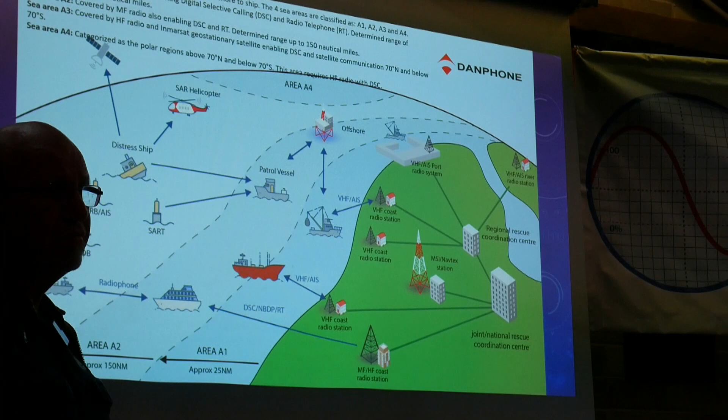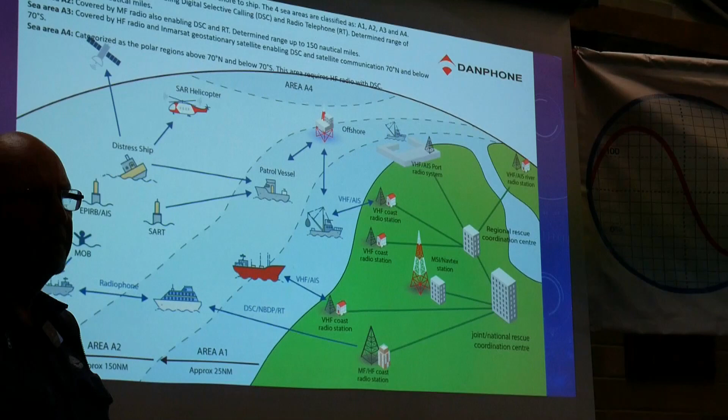You've also still got your MF/HF radio, but now with the MF/HF radio, as well as voice, you have digital selective calling, where the DSC terminal is programmed with the ship's identity, which is a 9-digit maritime mobile service identity number. So that identifies the ship, and you can send a DSC call from one vessel to another for general establishment of communication, if you want to request that they tune to a specific voice channel. You have to have the digital call.

Like there's no one listening until it's opened up by selective call, isn't it? No, well, it's inbuilt with the HF radio these days. It'll have a DSC watch receiver inbuilt. Yeah. So what I'm getting at, you can't get on the radio and call anybody with a voice because no one's listening. No, I mean these days no one's maintaining watch. So basically you've got to establish a circuit, to call the vessel via selective call. Yeah. And that's the same with VHF as well these days.

Depending on the configuration of the vessel, you can have either a dedicated one channel, on 2187.5 kilohertz, or, if you go to another option, they have a 6-channel scanning receiver running in the background, which covers 2 megs, 4, 6, 8, 12 and 16. I won't bore you with the exact frequencies. I put a call out on 7045 from a ship once or twice. Oh, really? Okay. No one got back. Yeah, for various testing. But if somebody's listening on that frequency, they can still hear it, can they?

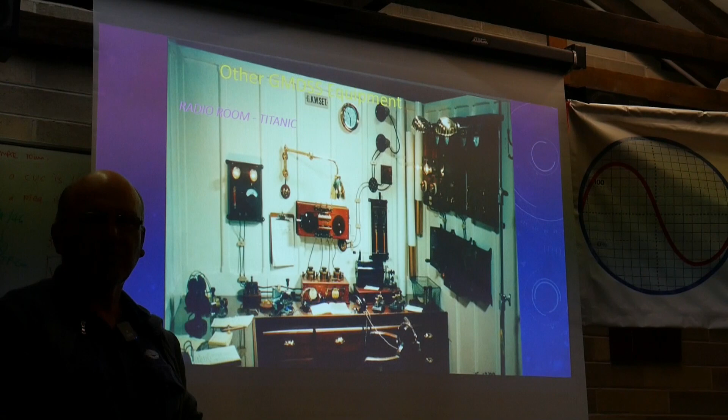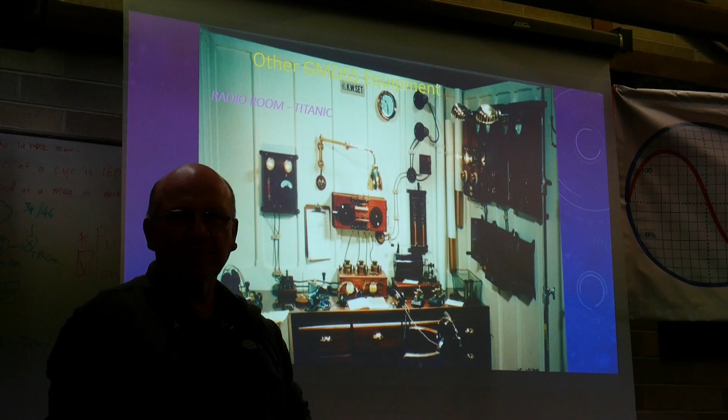In those days, any time I'd go on board to do a radio survey to check the equipment, the last thing I wanted to do was actually try to tune up a transmitter. So it was Sparky's job. Tune up on a particular frequency, and I'd just check that it's got the right meter amps. We used to get sometimes 30 amps aerial current on 500 kilohertz. Wow. Last thing you wanted was to get an RF burn as well.

In those days that's the way we used to calculate. There wasn't really a power reading. It was the meter amps, the aerial current, and that's it. That was Australia, but in Japan they'd send a vessel with a field strength meter and do a plot. A much more thorough way. I think the higher your aerial was, the better meter amps you used to get out of it. And that was the thing, trying to achieve the right readings.

Anyway, getting back to where we got to. We've talked about the VHF. The HF, again, same sort of principle as I was saying. You can have voice, and you can have digital selective call.

Again, if all else fails, you've got the distress button on the front of the radio, which you hit and it'll send out a distress call, and any vessel within the area should hopefully pick it up. With the advantage of the Inmarsat one, obviously it relays straight up to the satellite. So regardless of where you are, you don't have to rely on ship to ship, or someone nearby. It's just basically straight up to the satellite, down to the closest.

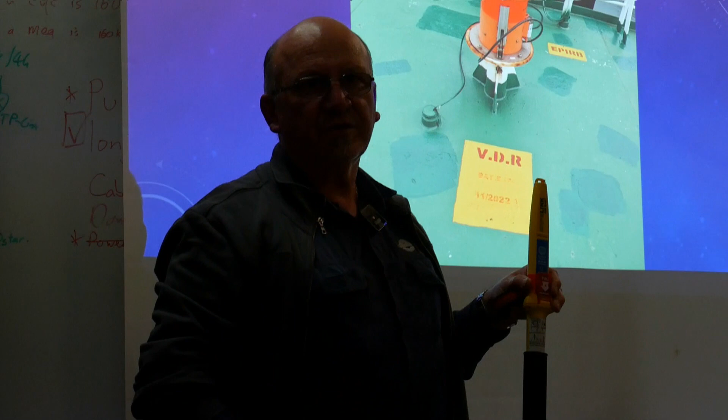I was talking about the radar transponder before. You've got the alternative these days, an AIS search and rescue transponder. So rather than operate on the 9 gigahertz X-band radar frequency, this one operates on the 2 AIS frequencies. And again, any vessel within range, their AIS receiver, which is integrated into the radar, will pick it up and display it on their screen. So instead of getting a series of dots pointing in a particular direction, you'll get a physical point. That's where the vessel is.

It won't identify the vessel because it's not programmed as such. It's just a blip on the screen. It's got a unique serial number. Each unit has its own serial number, and no 2 manufacturers will have the same serial number. So it's unique to that particular unit. I don't think they keep a registry of who's got what, but obviously if you see one of these things going off, it's gone off for a reason.

If you're testing that, it has a test facility. It comes up marked as 'test,' but if you actually activate it and click, you get a different message on the screen. You can select the target, and that's where the identity information will show up. It'll also report the position, since it's got a GPS built in, and that's the differentiation. If you see one come up on the screen and hit the target and it says test, it's someone carrying out a test, like a radio surveyor or someone on board, for the annuals and that.

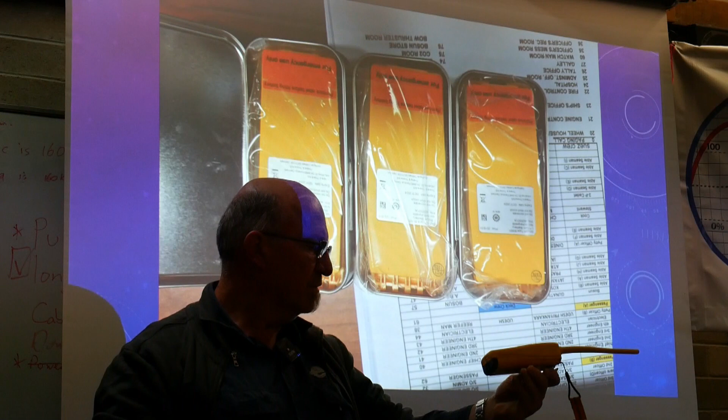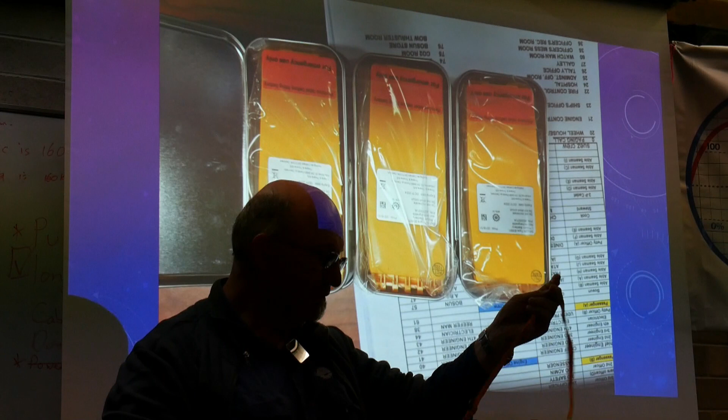You've got the rechargeable battery the radio is normally fitted with, and you'd usually have 3 on board a typical vessel. They'll float to some degree, but I wouldn't want to test it. I had one given to me by a client, similar one, it's black, and he found it on Bunham Beach. It still floats and it still works.

The black ones are the non-GMDSS ones. The other ones have to be either yellow or orange, that's one of the other requirements. Obviously they don't have a digital selective call. They have an emergency battery that comes with it, which is a different brand, for a Sailor radio.

So basically, you've got your rechargeable battery and your one-use battery. In case of an emergency, you take those with you. When the rechargeable battery runs out, you've got the spare battery to use until it's depleted. Those batteries are valid per regulation to be replaced every 5 years, so once 5 years is up, regardless of whether they've been used or not, you need a new set of batteries to be in compliance.

Likewise with the SART, the batteries are usually valid for about 5 years, after which you can have the battery renewed. For EPIRBs, technically you can replace the batteries if the manufacturer sells you the battery, but the problem is that battery replacement is part of the shore-based maintenance done every 5 years, where the EPIRB is pulled apart, the battery replaced, and spec checks done - really critical checks on the unit, to the point where you need a screened enclosure to operate the EPIRB in, so you don't get any false activations. So it's cost prohibitive given the price of the battery and the amount of work involved in the replacement.

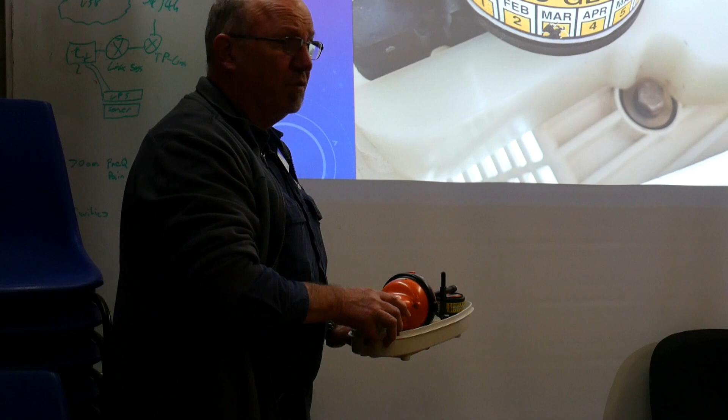Speaking of EPIRBs, they usually sit in an auto-release cradle on the railing or some external part of the vessel, within range of the wheelhouse, and anywhere it's not going to get fouled. If the ship goes down, you don't want the EPIRB going down with it. Once it deploys, you don't want it getting caught in any superstructure, so you want it away from everything. The best idea is to grab it and take it with you, that way the rescue party can come look for you rather than the ship that's gone down. You've got 2 ways of activating the EPIRB.

Manual activation, where you rip the tab off and switch it on, or if you just drop it in salt water, you've got salt water contacts which completes the circuit and off it goes. You've got a lanyard which you can use to attach it to the life raft so it's towing not far away.

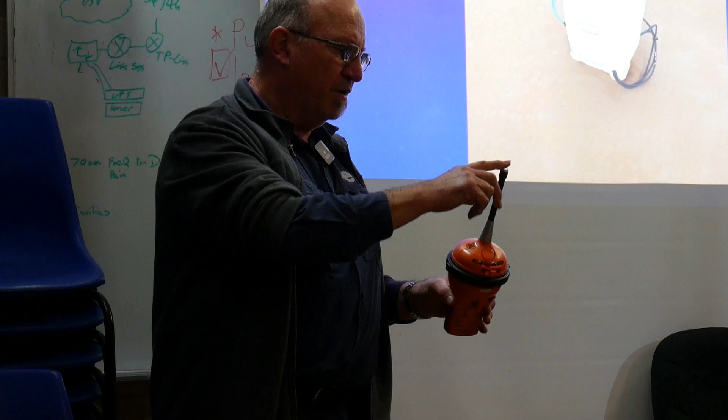Once it goes off, you've got a strobe light that repeatedly flashes at regular intervals, to act as a visual homing signal.

EPIRBs, as far as programming, you can program the ship's MMSI number into it, and that way, if the EPIRB has been registered - which is a common thing in Australia, not so much with other countries - there's a central database that's maintained, and they can easily identify what vessel is in distress, and they should have the contact details of the owners or operators.

So the first point is that if an EPIRB's detected, they find out who the operators are, call them up, and just make sure it isn't a false distress. Once they ascertain it is.

I'll tell you a funny story about that. I used to sell EPIRBs at retail recreational boat level. We sold 10 to a fishing club. This is when 406 EPIRBs first became compulsory for boats going more than 2 miles offshore or something. We sold 10 to a fishing club, and we said to them, look, we've got to register these to the person that's buying them.

Part of the deal was you got 2 registration forms in the box - one was for the dealer to register and send off, and one was for the buyer to fill out his details and send off. So they should be exactly the same details when they got to AMSA. That was all okay - the guy from the club came down, picked up the 10 EPIRBs with 10 names and addresses, filled out the forms, but then went back and gave the EPIRBs out willy-nilly.

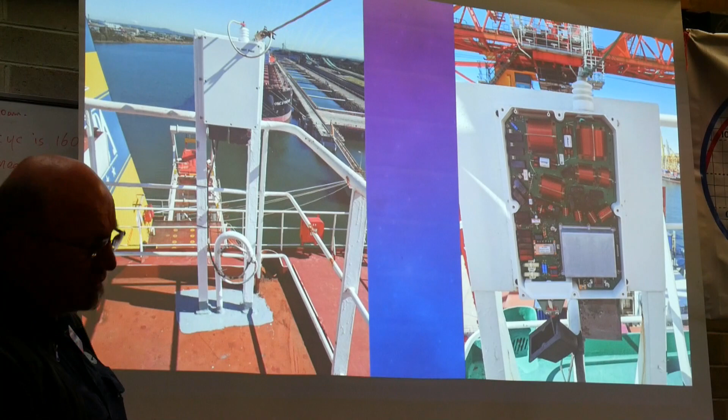Now, changing the subject. One of the things we're required to do, with the equipment on board, is have it checked annually as part of what we call a radio survey.

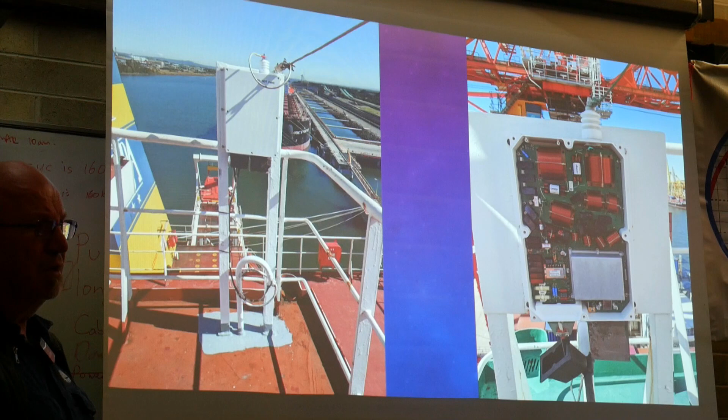Each vessel is registered under a different classification society. A classification society is basically an organisation that sends marine surveyors on board to check the vessel and make sure it's fully compliant, with no deficiencies as far as construction, machinery, or whatever. Basically, it's a prelude to the ship getting seaworthiness and insurance.

They do the inspection as far as construction and other things like that, but obviously the radio side of things goes to people with experience in that area. So the likes of Electrotech, we've got qualified radio surveyors who go on board and check the equipment to make sure it's working correctly - check the VHF radios, for instance.

These days testing is a lot easier with a device that does a multitude of checks. It can check the EPIRB, decode what it transmits just to verify it's programmed correctly and operating correctly on all the valid frequencies. You can test the SARTs with it, handheld VHFs, send and receive DSC calls both to VHF radios and HF radios. Basically you can confirm that everything is functioning correctly.

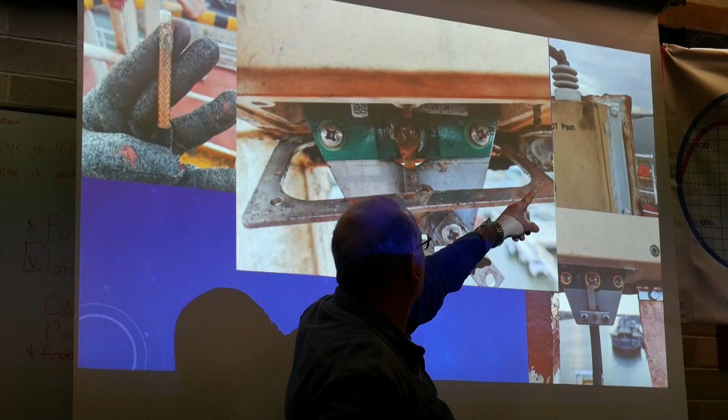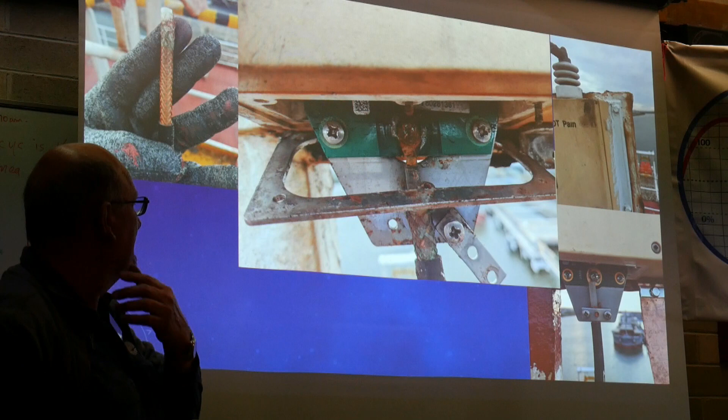The casing leads to water ingress, and then you've got problems. Was this still semi-functioning? No, it had failed, and they were wondering why. Once you start getting water in the coax, you've usually got big problems. But thankfully, that had a loop in it, and it happened early enough that it didn't cause further damage.

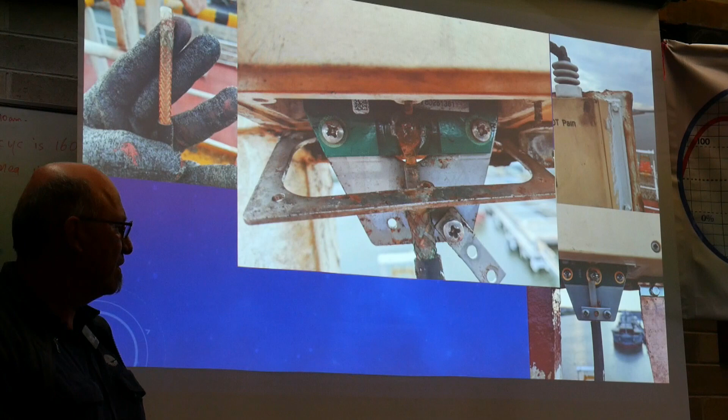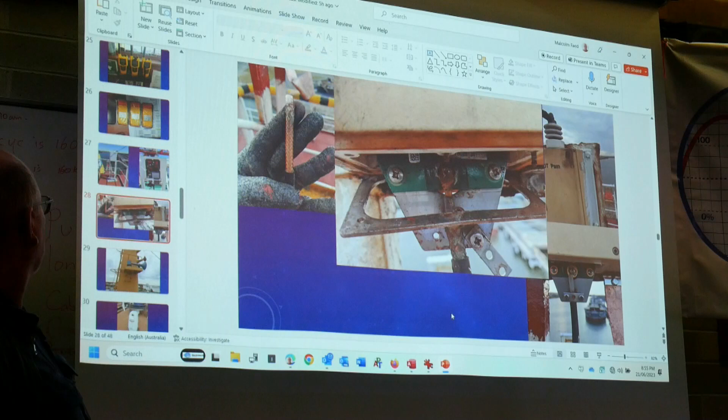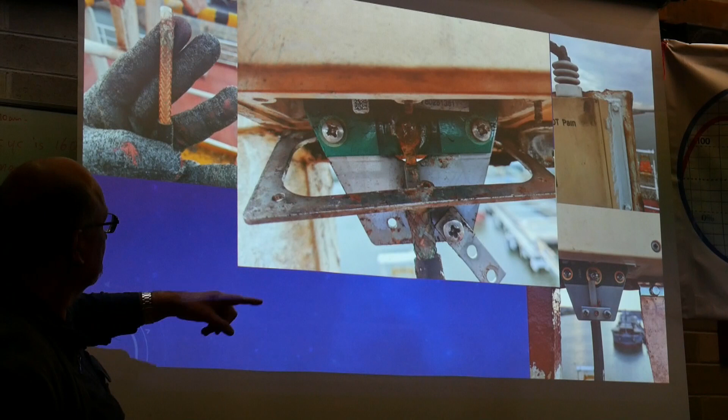Maintenance of - is that centre terminal there a copper strip? There's like a PCB, it's the circuit board, yes. That's the other end of what Malcolm had earlier on in the piece. Mind you, the other thing is at this point here, which you can just barely see, there's an earth point where normally you'd hook up a...

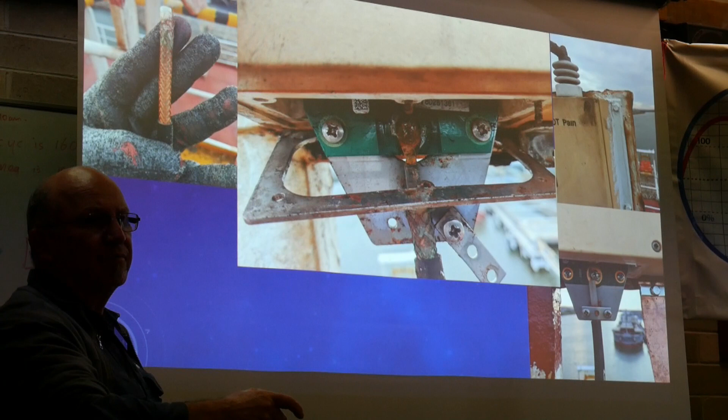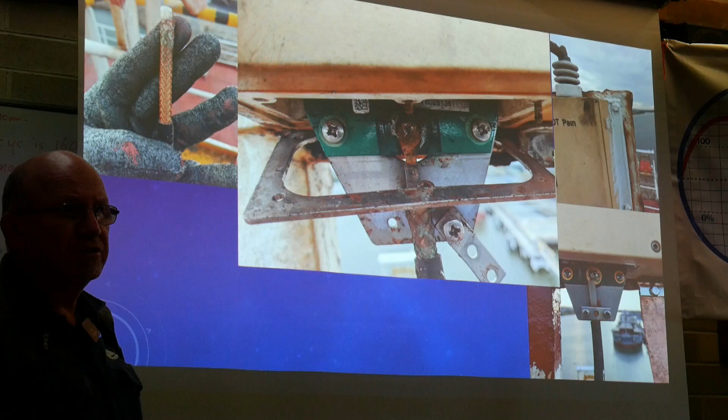Does that just connect to the hull of the ship? Yeah, that's it - you need to have it for a ground reference as short as possible, otherwise you get tuning issues.